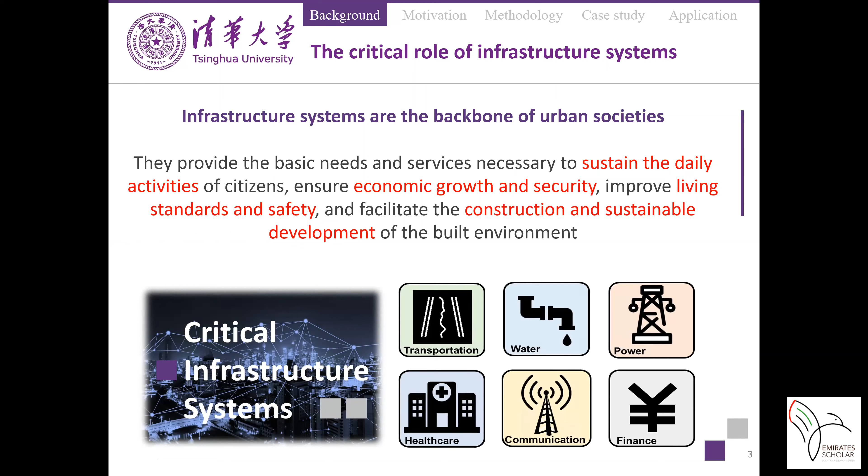Infrastructure systems such as transportation, water, power systems are the backbone of urban societies. They provide the basic needs and services necessary to sustain daily activities of citizens and also to ensure economic growth and sustainable development of the built environment. However, these systems are not independent, but rather they rely on each other to ensure their proper operations. And the interdependencies between these infrastructure systems give rise to several problems or challenges.

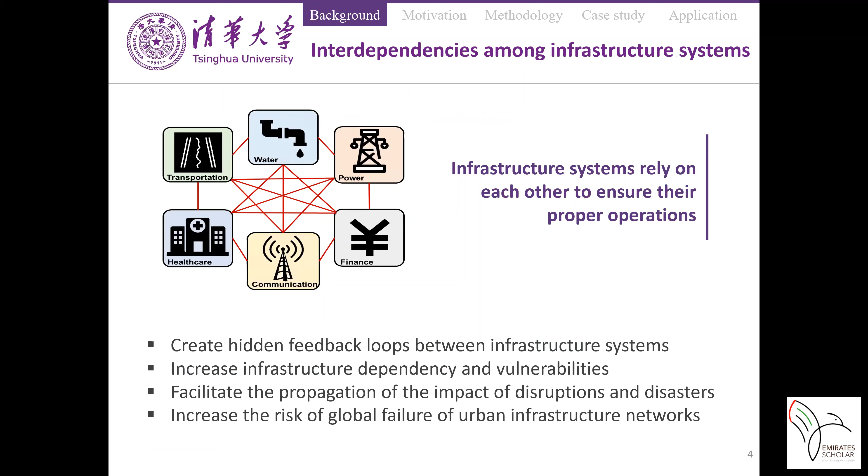For example, interdependencies increase the vulnerability of infrastructure systems and facilitate the propagation of the impact of disruptions or disasters in the system. Prior studies have attempted to address these challenges by proposing different approaches to model and study infrastructure systems, for example, network-based modeling, agent-based modeling, system dynamics modeling. Although these approaches are able to represent the systems and their functionalities, they only present a highly abstracted representation of the topology and the functionalities of the systems, leading to limited ability to capture systemic heterogeneities among the systems and their components, and also provide insufficient consideration of the functional interdependencies between the systems.

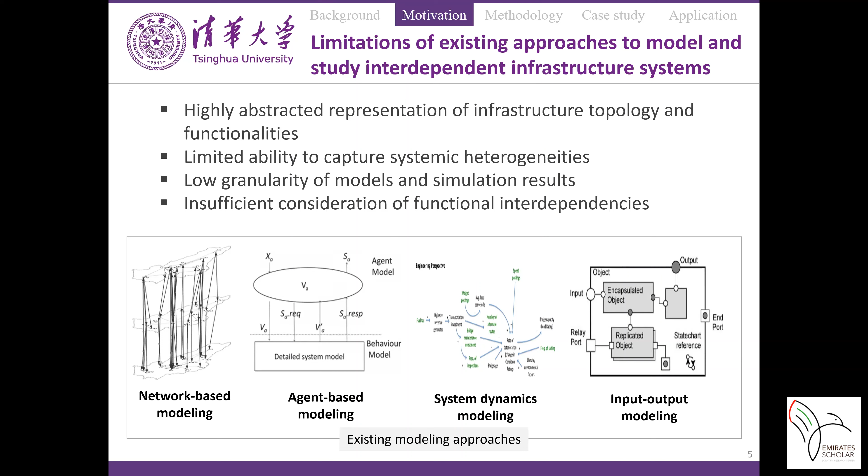These limitations can be well addressed by using domain-specific models. These are physics-based models that leverage the knowledge, data, and techniques that have been accumulated over several years of research in the individual infrastructure system domains. So basically, our study aims at proposing a framework that can integrate multiple fine-grained infrastructure domain-specific models to develop more detailed, improved, and realistic interdependent infrastructure systems models.

But one problem arises due to the fact that these domain-specific models have been developed independently of each other based on equations, algorithms, and physics that are specific to individual infrastructure systems, so they cannot be simply linked together. There arise issues of interoperability due to the heterogeneous nature of the models, the data, and the simulation tools.

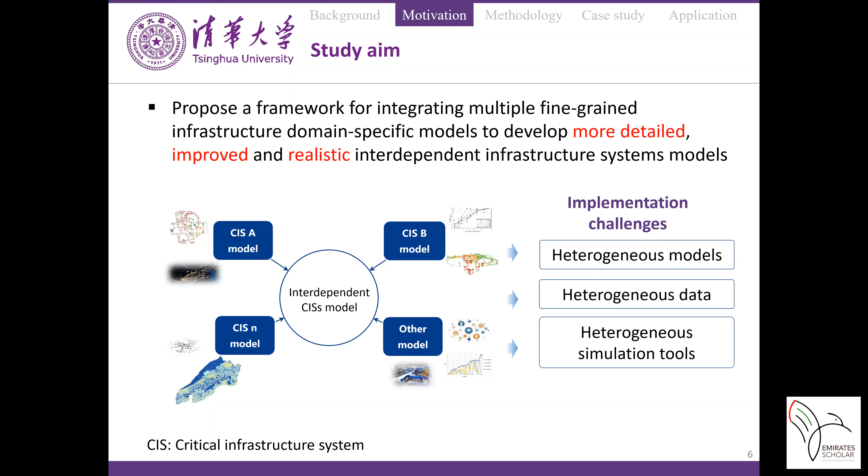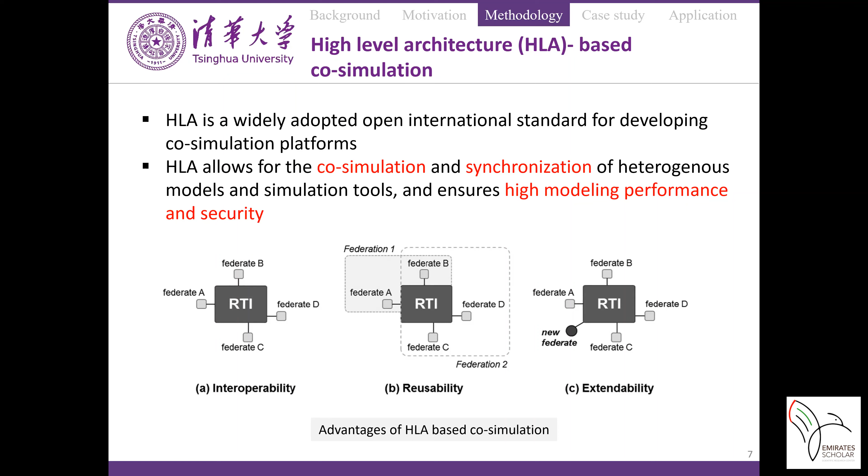So to address this problem of interoperability, we decided to adopt a high-level architecture-based co-simulation technique. HLA is a widely adopted standard for developing co-simulation platforms that offers several advantages, including interoperability of heterogeneous models and data, reusability and extendability of federations, and also security to the modelers and to their data. So based on the HLA standards, we proposed an HLA-based framework for modeling interdependent infrastructure systems.

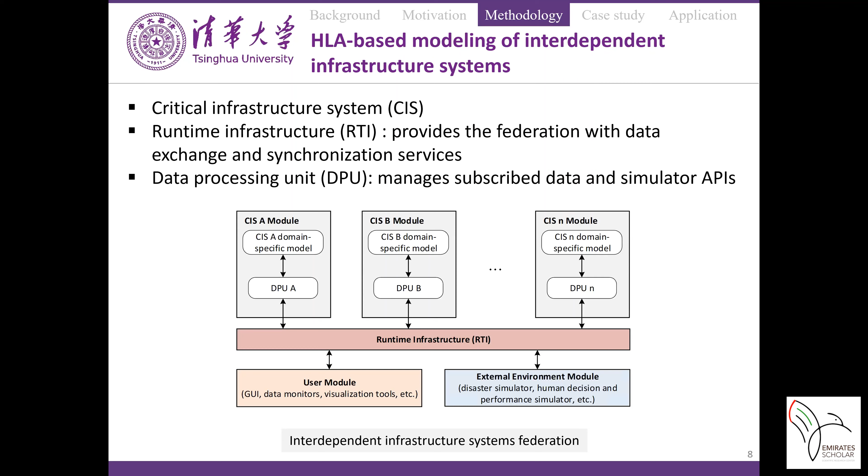And the architecture also has other modules, such as the user module, which consists of graphical user interfaces, data monitors that facilitate the interaction between the federation users and the federation, and also an external environment module that consists of disaster simulators, human decision models, and so on. The data exchange and data processing mechanism of the federation is modeled in the form of publishing and subscription of data between the domain-specific models. And the subscribed data is processed by means of dependency functions to obtain an input which can be assimilated by the domain-specific models. So this is the overall framework that we proposed.

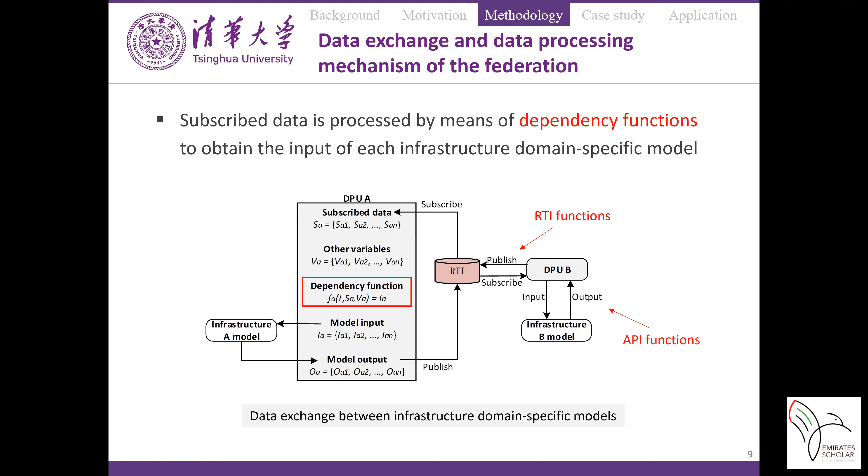Now, to test the effectiveness of our framework and to validate the framework, we conducted a case study of the infrastructure network of Shelby County, Tennessee, in the United States, which has a population of about 940,000 people and a surface area of 784 square miles, which is a significantly large-scale network of infrastructure systems. And we focused on the interdependent power and water systems.

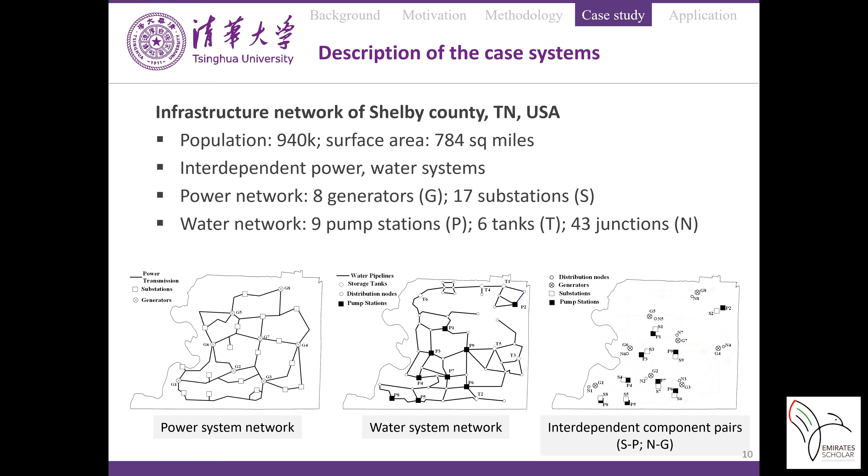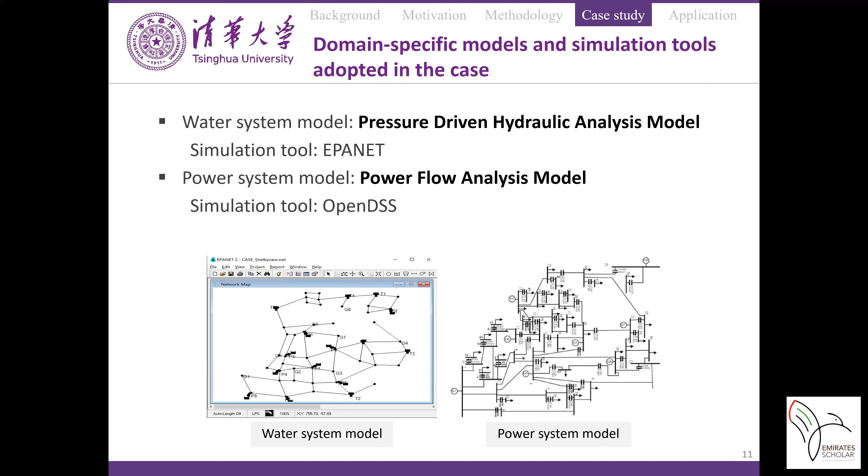Then to model our systems, like we said, we used white-box models, which are physics-driven models. For example, for the water systems, we adopted the pressure-driven hydraulic analysis model, and we used the EPANET API simulation tool for simulation purpose. And for the power system, we adopted the power flow analysis model, and we simulated it using an OpenDSS API package.

So our interdependent infrastructure systems model was simulated under normal operational conditions for a simulation duration of 48 hours. And the conditions of the simulation were set in such a way that the demand in the water system could alternate based on a typical urban water demand pattern, whereas in the power system, the demand was fixed.

The reason for doing so was to be able to observe how the dynamics within one system could affect the functions or the behavior of the interdependent system. And by so doing, we will be able to validate and verify that our framework is able to actually simulate interdependent systems and the interdependencies between them.

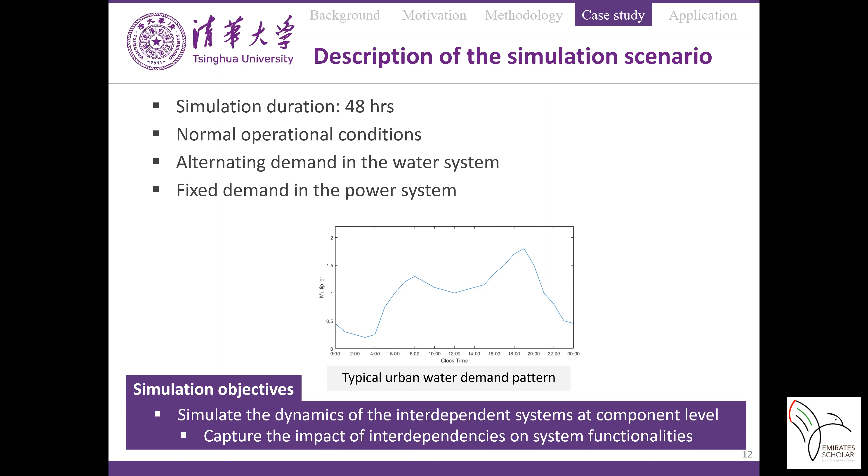So coming down to the simulation results, the results demonstrated that the proposed framework is able to provide detailed simulation of the evolutionary states and behavior of the systems at a component level, which is very important, component level, rather than system level like prior approaches.

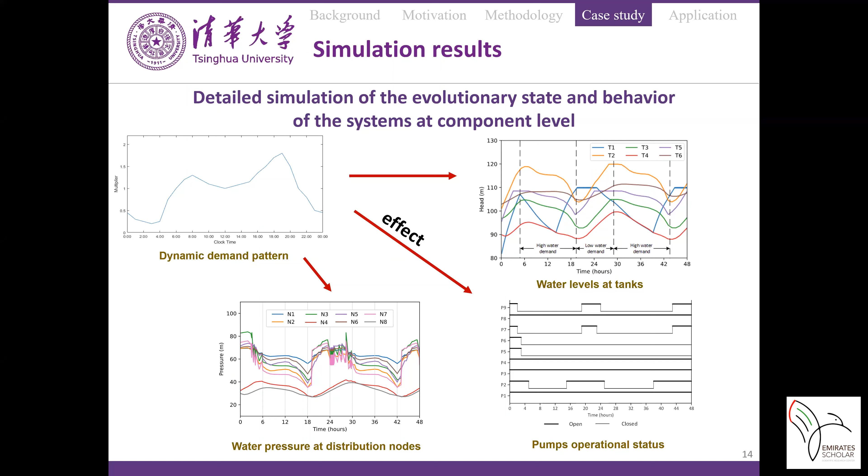For example, here, the changes in the demand were able to affect different metrics within the water system or affect the behavior of different components within the water system. And these behaviors can be traced in detail and analyzed for other purposes. Secondly, the developed model was able to capture the interdependent effect. That means the intra and inter-system influence paths and mechanisms could be observed.

For example, the changes in water pressure were controlled by the operational statuses of the pumps within the water system. And then we are able to also model how the changes or the dynamic processes happening within the water system are going to affect the power system, since the power system was responsible to supply power to the pumps within the water system.

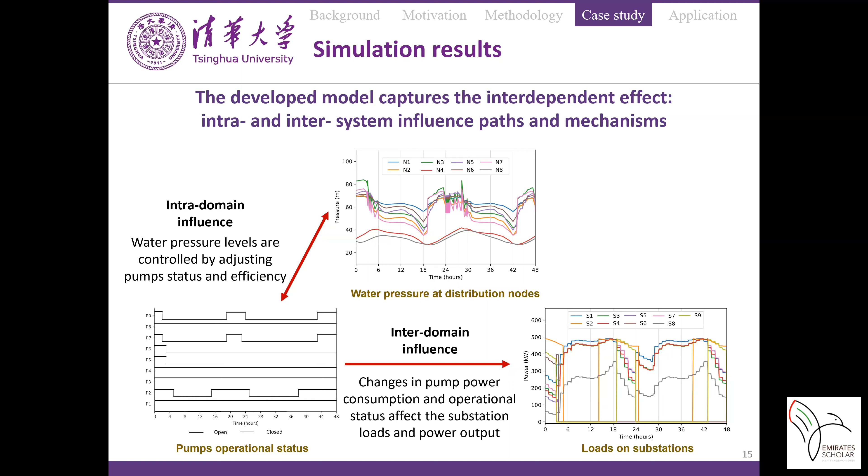And finally, the simulation results also help to identify vulnerabilities in system design and operational processes. For example, in the figure here, we are able to identify some stability issues in the water pressure within the water network due to the closure of certain pump stations. And this may indicate faulty design of the water distribution network, which are later improved or solved.

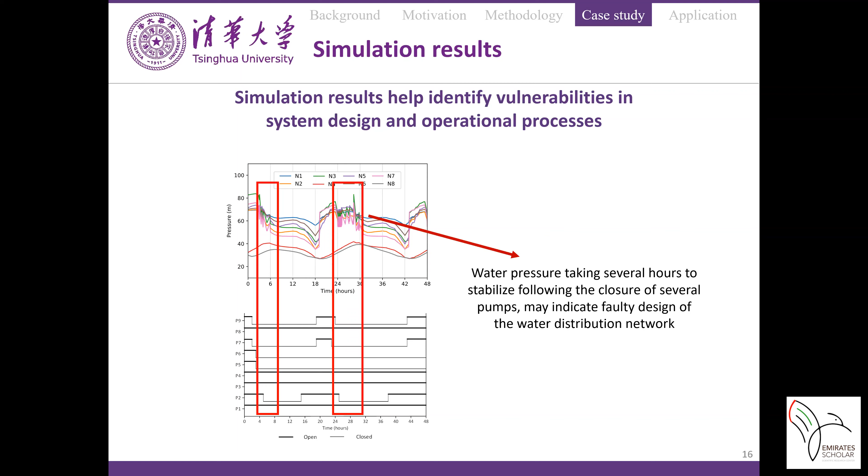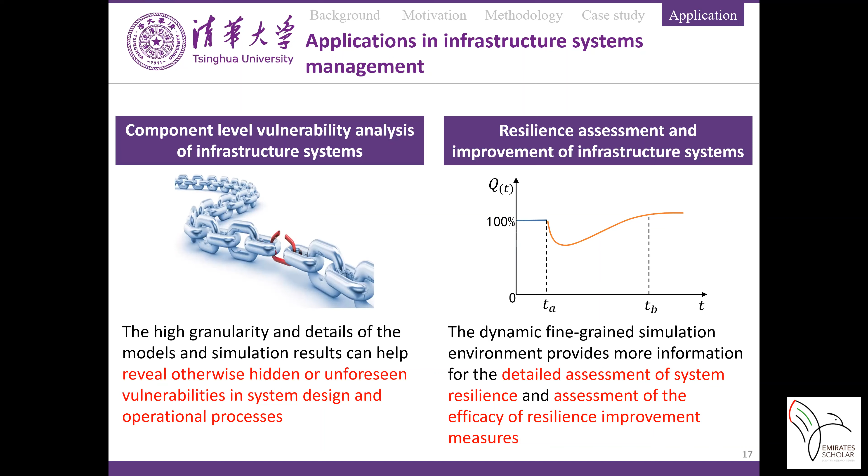So our study provides a significant contribution to the area of infrastructure systems management in two ways. The first is that it contributes to component level vulnerability analysis of infrastructure systems, thanks to its high granularity and details of the models and simulation results. And also the dynamic fine-grained simulation environment provides more information for the detailed assessment of system resilience, and also the assessment of the efficacy of resilience improvement measures.